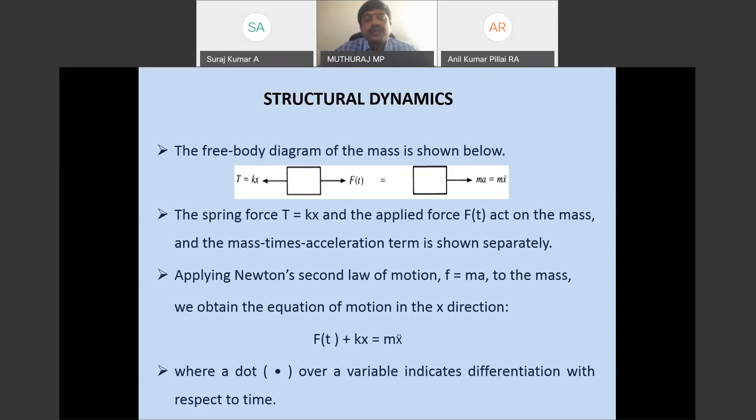Similarly, when you want to scan any building, or when you want to understand the building, first you always have to use this equation, because free vibration without damping alone will give you the basic behavior of a structure. The basic behavior of the structure has to be understood by natural frequency. Natural frequency is denoted as omega. Omega you always have to find. For any building, we always have to find the natural frequency. Apart from this, there are 3 other vibrations also.

You can see here in this slide that omega is equal to root of k by m. Omega is always associated with stiffness and mass. Stiffness is an inherent property of the structure. Mass is also an inherent property of the structure. So externally, no load will increase or decrease your natural frequency. Natural, you can understand that. Frequency is a term. Naturally, what is the frequency? That you always have to estimate.

Like the properties and behaviors you have in your human body, your pulse rate and your heart rate entirely depend on how your body is. Similarly, what is the weight? From weight you can convert it into mass. Then k is nothing but stiffness. Stiffness depends on material property and geometric property. Material property is known as modulus of elasticity, because we will be designing the structure as a linear, static and elastic structure. So for linear and elastic structures, you can easily find k as EI by L. E is modulus of elasticity, I is geometry, L is length. So everything depends only on the inherent property and inherent behavior of the structure.

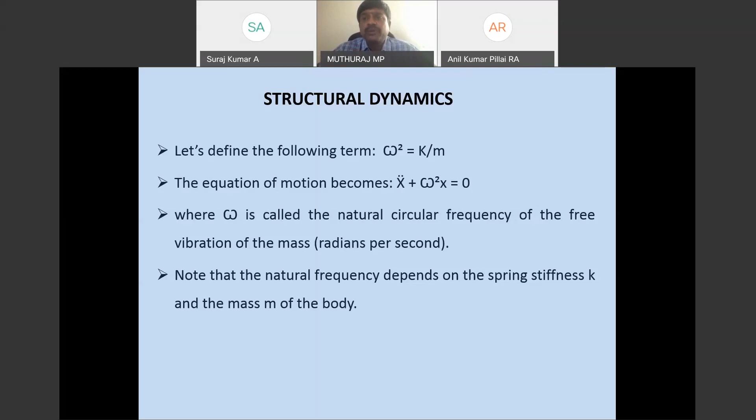So we always have to spend some time on how we can find the natural frequency. Natural frequency is always very, very important. But we cannot directly go and find the natural frequency of any building. So before finding the natural frequency, first let us try to understand the basics of dynamics. When the structure starts vibrating, whatever the maximum displacement is, that is called amplitude.

Actually, displacement is of 2 types. We all know that it is translation and rotation. Rotation is also very important. Translations produce forces, rotation produces moment, as we all know. You usually will be finding M-phi curves or P-delta curves. So whenever you are interested in finding the displacement, whether it is a rotation or a translation, in dynamics it is the same, but the translation here is called amplitude of vibration, because it is time dependent. So for any time dependent vibration, you always have to estimate the amplitude. Amplitude of the vibration is very, very important.

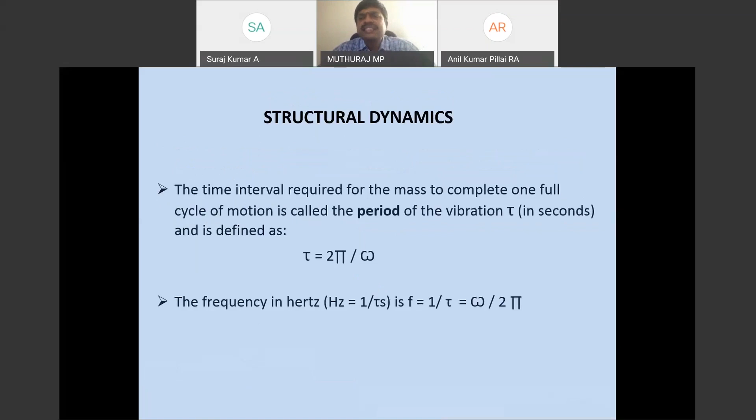Usually in earthquake problems, we will be restricting the amplitude of vibration to 10 millimeter. Whatever building you have, it shakes horizontally. When it shakes horizontally, how much amplitude do you want to limit? That you have to learn, because here the curve is shown in the horizontal direction. You have to verify the horizontal displacement. That horizontal displacement is called amplitude of vibration. After that, you can estimate the period. Frequency means how many cycles of vibration your structure undergoes. Usually it will be in terms of hertz.

These are the definitions one has to understand. Degree of freedom is always very, very important, and it is very simple. It is the definition normally people use in statics. In statics, degree of freedom is the number of independent possible displacements. Possible displacements are translations and rotations. So the number of independent possible translations and rotations required to define the deformed shape of the structure is known as degrees of freedom. That is for a static structure.

Because the earthquake is a horizontal force. The earthquake will hit your structure at the bottom. So horizontally, when it hits, what will happen sideways? That you have to understand. So usually we'll be taking the horizontal degree of freedom rather than the vertical degree of freedom. But if you are taking the vertical degree of freedom also, it is fine.

But the only thing is that you have to estimate and evaluate what will happen in the horizontal direction. Horizontally, how much amplitude of vibration is there? How do you have to resist? How many cycles of vibration are there? For that, you always have to understand the basics and the basic definitions with reference to dynamics. So degrees of freedom is very important.

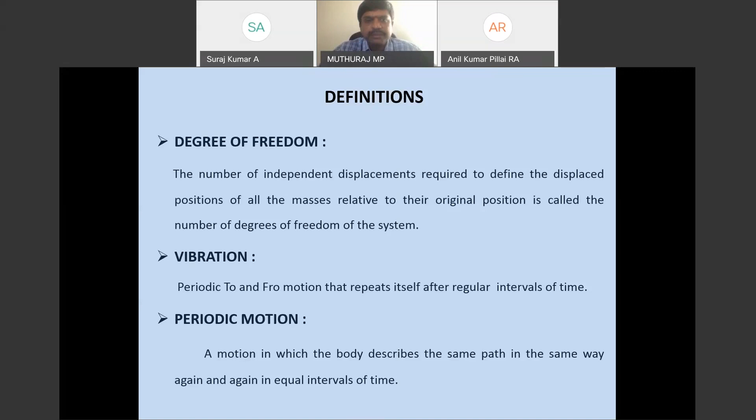Then vibration, then periodic motion. Periodic motion is nothing but a sinusoidal curve or any particular curve. That will not happen with reference to earthquake, but to understand the basics, you should know what it is. Then stiffness is known to us. It is the load required to produce unit deformation. Then time period. Time period is constant. Amplitude of vibration will always be different, but time period will be constant.

Suppose, for example, a structure is undergoing 7 cycles of vibration; for each cycle, the time period will be constant. It may be 1 second or 1.5 seconds. At this moment, I can tell you that the maximum possible vibration will happen within 30 seconds. So over the period of 30 seconds, how many cycles of vibration? If your time period is 3 seconds, then 10 cycles of vibration will be there. If your time period is 1 second, your structure will undergo 30 cycles of vibration. So based on the time period, you can find the frequency, natural frequency and all these things.

Then logarithmic decrement, it's very, very important because all our structures will have damping, because damping is an inherent property. There are 3 important inherent properties in a structure. First, I told you about mass, then you have stiffness, then the third one is damping. So mass, stiffness, and damping are very, very important for any structure. So when damping is there, the number of cycles of vibration will be slowed down. Instead of going for 30 cycles of vibration, the structure will undergo 10 or 5 cycles of vibration.

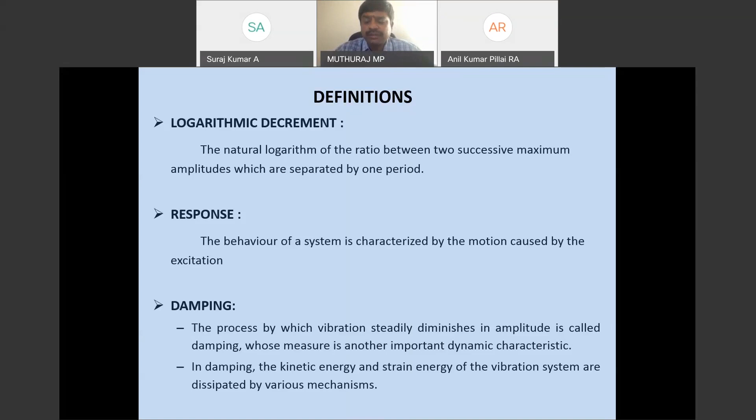That is m u double dot plus c u dot plus k u is equal to F of t. This is the generalized equation of motion. When c u dot and F of t are 0, it is called free vibration without damping. And when F of t is equal to 0, it is called free vibration with damping. Then similarly, forced vibration: forced vibration without damping and forced vibration with damping. So there are 4 different types of classifications that one has to understand.

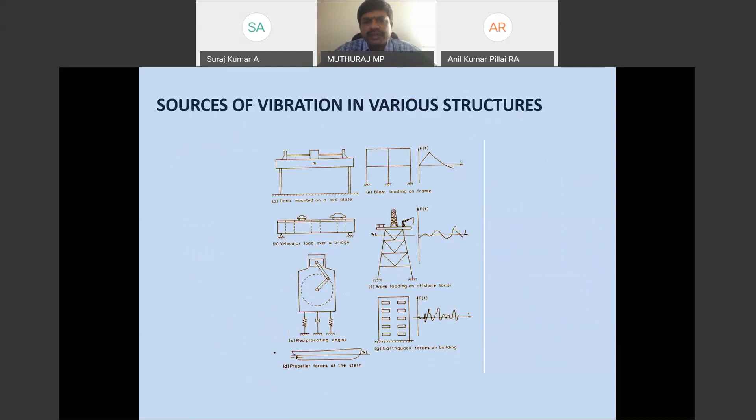So now let us try to understand that. Before going into that, what are the important components? That is damping. After that, you see that vibration is common. It may happen with machines and buildings everywhere, even in towers; wind force and many things can cause vibration. But we have to idealize the structure, because when we make a mathematical model, the structure has to be idealized.

When you are going for an idealization, you can see that there are 3 components in a massless tower. You can see that mass is the weight of the tower. Then u is the displacement, the horizontal displacement. That's what I told you initially. The horizontal displacement is always very important.

But for example, you are having a 12-storied building, so you have 12 degrees of freedom. So for each and every degree of freedom, you have to evaluate what is stiffness. Stiffness for 1 floor, 2 floors is very easy, whereas beyond 3 or 4 degrees of freedom, it will be difficult. So I'll tell you how that can be evaluated. You can see this in this diagram.

You have force. Force is a function of time. There are 3 other forces: force due to displacement, force due to velocity, force due to acceleration. Force due to displacement is known as K into U. Force due to velocity is C into U dot. M into U double dot is nothing but force due to acceleration.

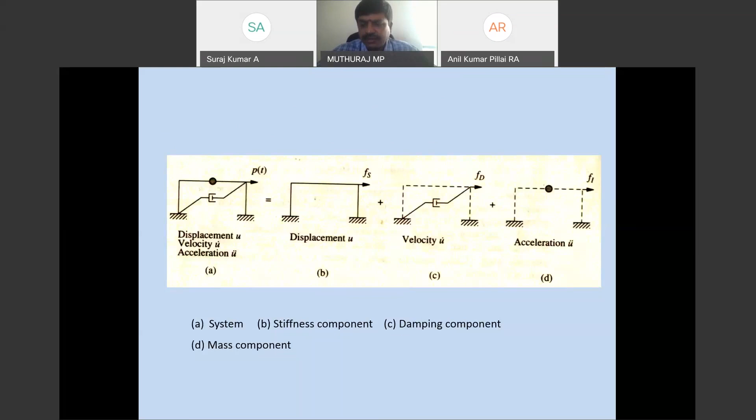Now let us come to a single degree of freedom system. For any single degree of freedom system, I told you that you always have to evaluate the natural frequency of the system. So when you are evaluating the natural frequency, what is the type of equation that you have? I told you already, m u double dot plus k into u is equal to 0. So it is a second order differential equation.

So one has to be very strong in second order differential equations to solve the problem, to find the natural frequency of the system. We are not talking about the earthquake force and other aspects of the seismic forces. To understand the basic behavior of the structure itself, mathematically one has to be very strong in solving the second order differential equation. When you are solving for amplitude, it has two components: one is the complementary function, another one is the particular integral. So for any problem, you always have to find the particular integral and the complementary function. Only once you are able to solve this can you complete this.

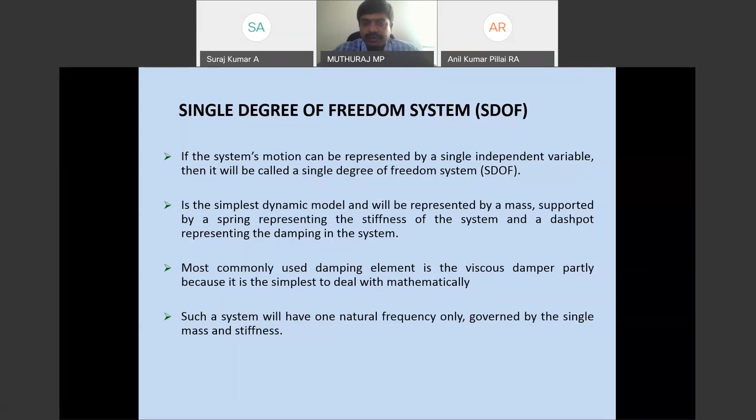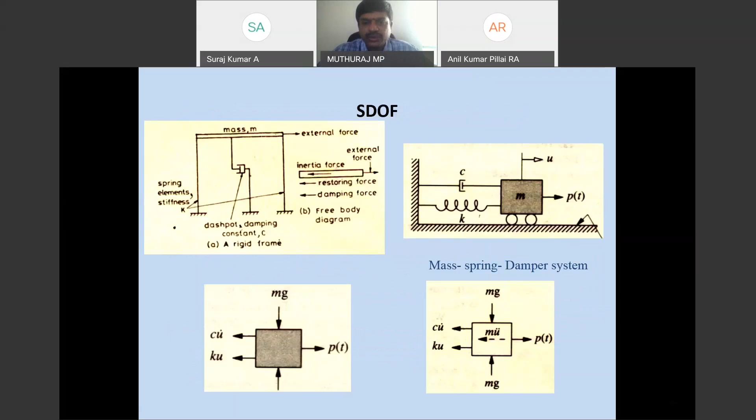So you can see in the last diagram, the mass spring damper system, you have force, then mass, you have m u double dot, c u dot, and k into u. This equation I already explained. So finally, you can find omega. Once you solve this equation, you can find omega. Omega is nothing but natural frequency, given by the equation root of k by m. These are the examples of single degree of freedom systems.

Next I will pass on to the multiple degrees of freedom system. If you are strong in mathematics, it will be easy for you, because I already told you that force equals stiffness into displacement. So displacements you can solve by means of stiffness. Once you know the stiffness, you can easily find displacements by taking the inverse: k inverse into f is nothing but u.

So when you are interested in finding u, usually you will be solving by matrix. Here there will be three matrices: mass matrix, damping matrix, and stiffness matrix. So you have to combine all three matrices and solve it. That's all. So when you are going for a multiple degree of freedom system, it is important to solve for stiffness.

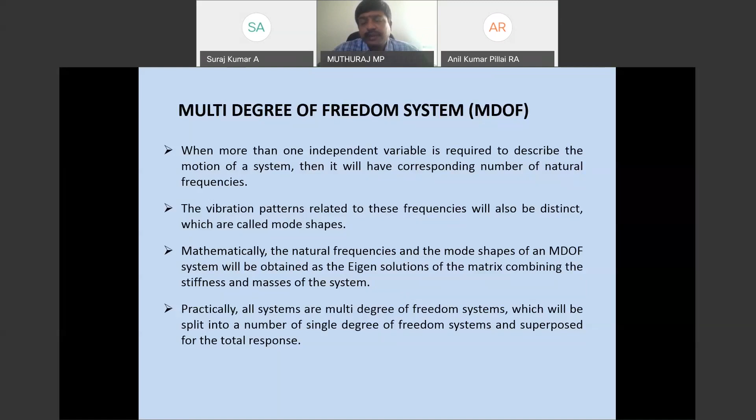To solve for the displacement or natural frequency: first, you have to find the natural frequency. Once you know the natural frequency, you can find the displacement. So to solve for the natural frequency, it is always very, very important for you to understand how you can evaluate the property. The evaluation is basically with the mathematics. So mathematically, you have to be very strong in finding the natural frequencies.

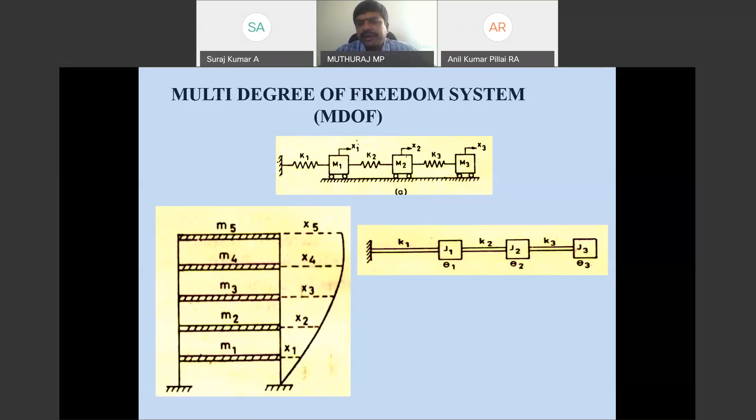So free vibration, as I told you already, is very, very important. For any free vibration, we have 3 types of damping systems. They are known as underdamped, critically damped, and overdamped systems. Most of the concrete and steel structures are underdamped systems. So underdamped systems will have a value of something around 0.05 or 0.02, as I told you earlier.

So for an underdamped system, you should know how to evaluate how many cycles of vibration are possible. Because, as I told you already, the time period will be constant. The time period for a particular vibration is always constant. Only amplitude is a variable. So you always have to evaluate the constant part, the time period. Then what is the frequency of occurrence of the earthquake at your place? Because the earthquake vibrations will be different at different places. Anyway, I'll come back to it when I discuss earth structures in the second part of my presentation. So these are all the possibilities.

Then the forced vibrations. Here it is external; the vibrations are external excitations. What are all the possible external excitations? We have impulse vibration, inertial vibration, harmonic, periodic, and transient. But our earthquake, we have to classify it as a transient vibration. What is a transient vibration? A transient vibration disappears with time. So the vibration will start and disappear within 30 seconds.

But impulse is different from transient. Impulse is very, very short. The time will be almost 0 seconds, or 0.2 or 0.3 seconds. That's what impulse is. Whereas transient vibration will go up to 30 seconds. So for a particular period of 30 seconds, you should understand what is happening with the structure, and how you can evaluate the basic properties and behaviors. The first property is displacement. Very importantly, we always have to evaluate the amplitude of the vibration.

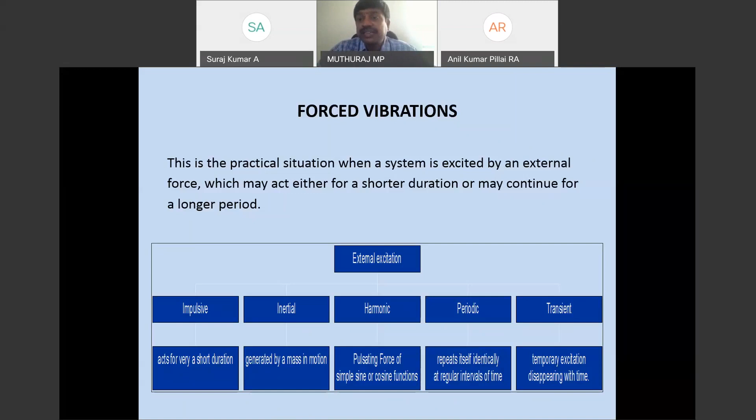So when you are interested in finding how the external earthquake excitation is happening, it is purely a transient vibration. So importantly, you have to understand the basic theory of transient vibration. For that, there are several mathematical formulations. Let us not go into the mathematics much, but anyway, for dynamic equilibrium, you also have a force polygon.

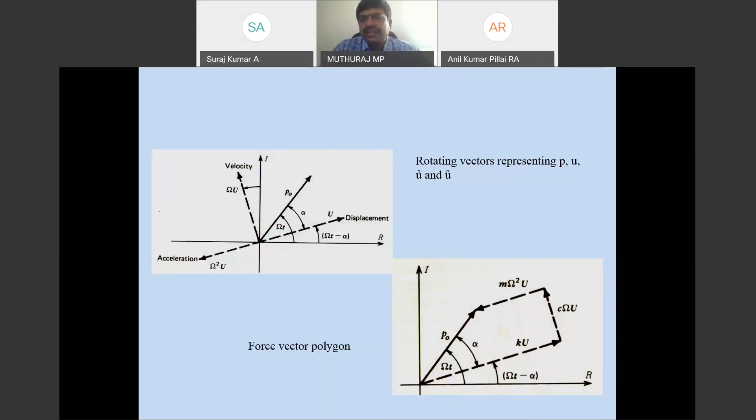So for that, you have to understand the second diagram. That's very important: Ku, Cu, and Mu. All these three things together are equal to P. This is called the dynamic equilibrium equation. You can also go with the force polygon. You can see that there are three forces: static force, damping force, and inertia force. All these three forces combine. The transmissibility is useful, but not much in the earthquake field. For machine foundations, we normally use transmissibility and these things.

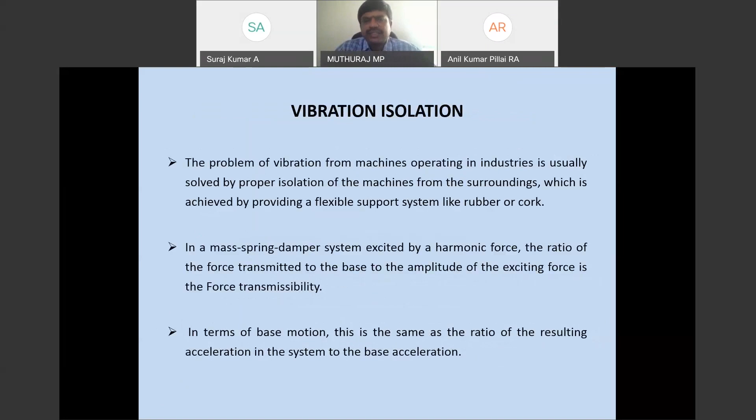Then what's very, very important, which you might have heard from many people: you have to isolate the vibration, because when the earthquake force is happening for a period of 20 or 30 seconds, your number of cycles of vibration should be as few as possible. So you have to isolate the vibration. How can the vibration be isolated? The vibration can be isolated with the provision of dampers: active dampers, passive dampers, and so on. So for that, you have to understand a little about the damping system. Then modes of vibration are always very, very important.

For a multiple degree of freedom system, as I told, you may have 5 degrees of freedom, 8 degrees of freedom, 12 degrees of freedom, as many degrees of freedom as you have. For example, your building may have 7 degrees of freedom. When you have 7 degrees of freedom, you have 7 modes of vibration. But not all the modes of vibration are important. The mode of vibration which gives more amplitude of vibration, that you have to select. That's what is very, very important. So where the amplitude of vibration is very high, those mode shapes you always have to take care of.

If a building has 100 mode shapes, all those 100 mode shapes are not necessary. Only 6 or 7 mode shapes are enough. When you have a 12-story frame, only 2 or 3 mode shapes are sufficient to define what will happen to your building. Because for the first natural frequency, you have some amplitude. For the second natural frequency, you have some amplitude. For as many degrees of freedom, you have as many mode shapes. So at least 1, 2 or 3. That's what we call the fundamental mode. So the fundamental natural frequency you always have to find. Based on the fundamental natural frequency, you can analyze.

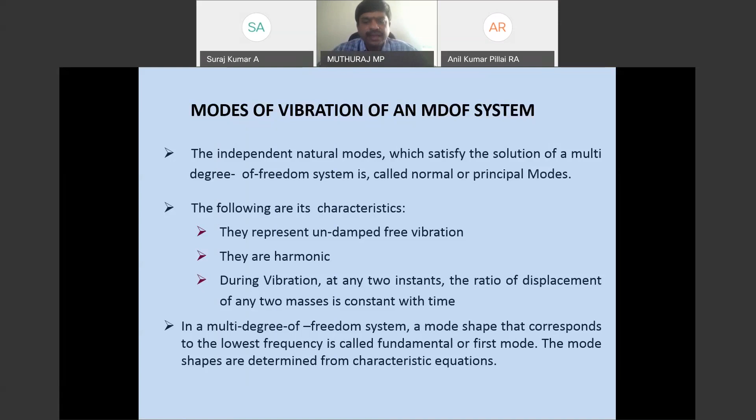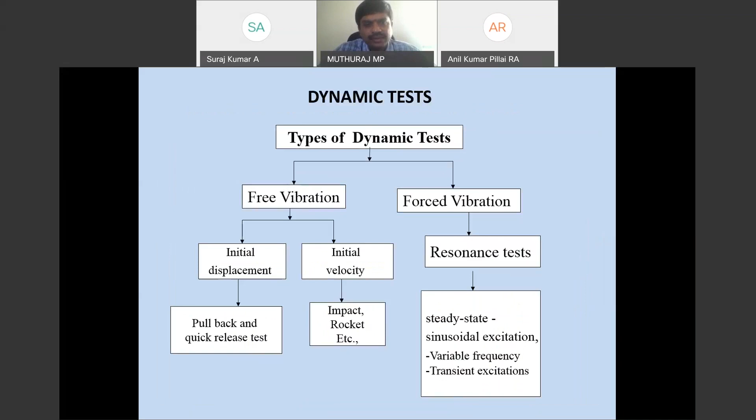I think you might have learned from what I talked about for around 15 minutes. It is always very important to understand structural dynamics. You should know structural dynamics thoroughly. What is frequency? What is natural frequency? What is time period? What is damping? What is stiffness? What is mass? All these things you have to be very thorough in. Only then can you come to the seismic concepts. When you don't know the basics of dynamics, it's very difficult to follow the seismic concepts.

So first, for any civil engineer, it's very important to understand statics. What is the static equilibrium equation? F is equal to K into U. You have to be very thorough in this equation, because for F equals K into U, you have a lot of equations to solve, a lot of mathematical processes. You have the moment distribution method, you have the stiffness method. So many things are there that you have to learn in the static condition.

After learning statics, you have to come to the basics of dynamics. You don't need to learn much about dynamics. Only what I told: for a transient vibration, what things are needed, those things you have to learn. Similarly, how to evaluate natural frequency, just learn those things. Then you can come back to learn how to design buildings with the earthquake resistant concept.

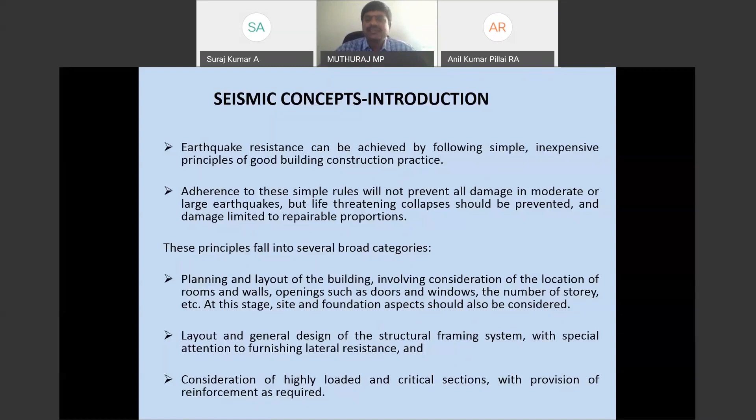So lithosphere and crust are very, very important, more than all other things. It is not necessary for us to know in detail about the inner core, outer core, and all these things. You just try to understand the basics. The radius of the earth is 6,400 kilometers. That is the first thing one has to understand.

The second important thing is that a lot of geological changes happen through geology. Geology classifies most rock formations into three groups: igneous, sedimentary, and metamorphic. But that formation takes millions of years, so the crust of the earth is always very, very important.

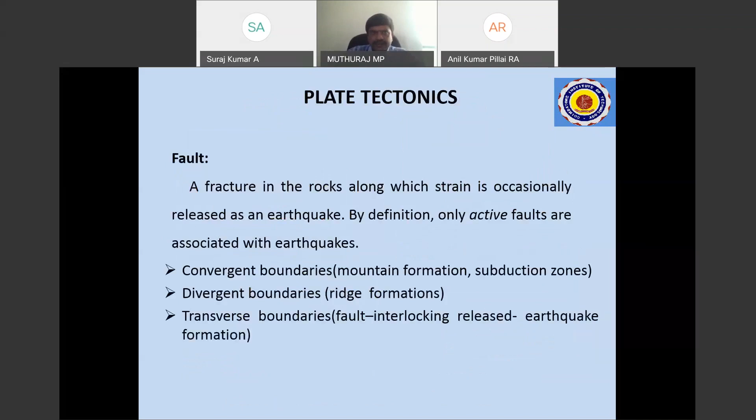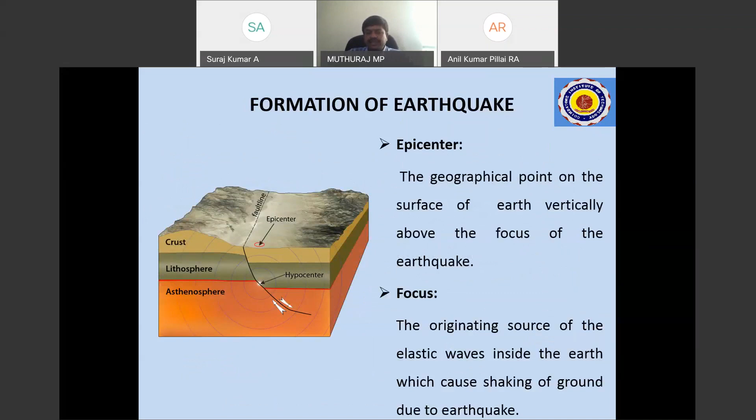Where the earthquake hits the earth's surface is called the epicenter. Inside the earth, in the lithosphere, that point is called the hypocenter or focus. So you have to understand what is focus and what is epicenter. Focus is below the earth, and wherever you find the field of vibration on the surface, that is called the epicenter.

Then there are seismic waves, which are collected as two types: primary waves and secondary waves. Based on our analysis, there are always two direct forces: axial force and shear force. The axial force is called P waves, and the shear force is called S waves. So there are two waves: primary waves and secondary waves.

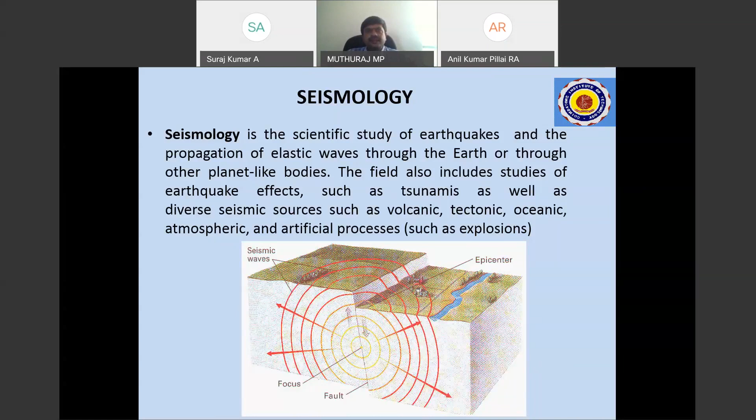There are a few things to see here about the different types of waves: the primary wave and the shear wave. These are the major waves, so there are two types of waves.

Then we have to understand focal distance and epicentral distance. Similarly, a shallow earthquake has its focus at less than 70 kilometers depth, which is very important to understand. A micro earthquake has very minimal amplitude that may not be felt by people. And fault is the failure zone.

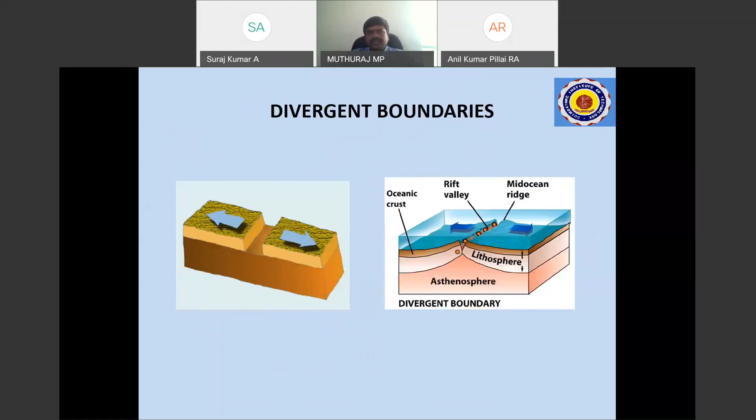The boundaries and waves have already been explained. Now there are a lot of earthquakes that have happened in India, so many earthquakes. You try to understand the Bhuj earthquake, the Killari earthquake—there are so many earthquakes.

What is very important in these earthquakes is to understand how long the earthquake lasted, what the time elapsed was, and what amplitude it produced in different places. For that, again, we have to look at this effect.

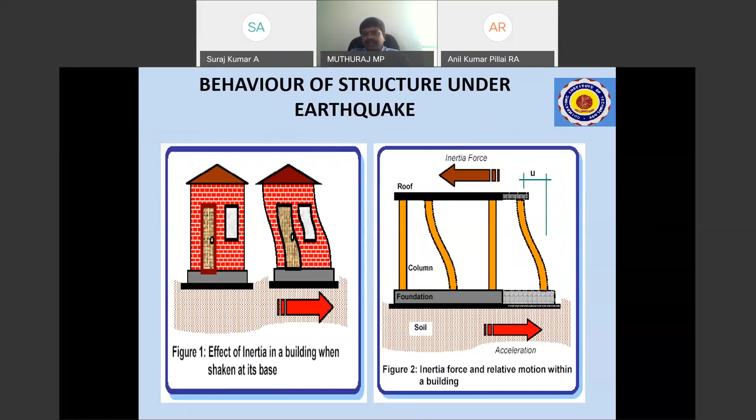You can see the behavior of the structures—I think you might have received this from many people. Usually we know that the earthquake vibrates horizontally, so the inertia force goes in the opposite direction. Therefore, you have to give much attention to the horizontal displacement, denoted as u, and then find accordingly.

Cycle of vibration will reduce. When you are having more natural period, cycle of vibration will be reduced, then slower shaking will be there. When slower shaking is there, it is good for your building. Such a way that you have to plan. That is about the natural period.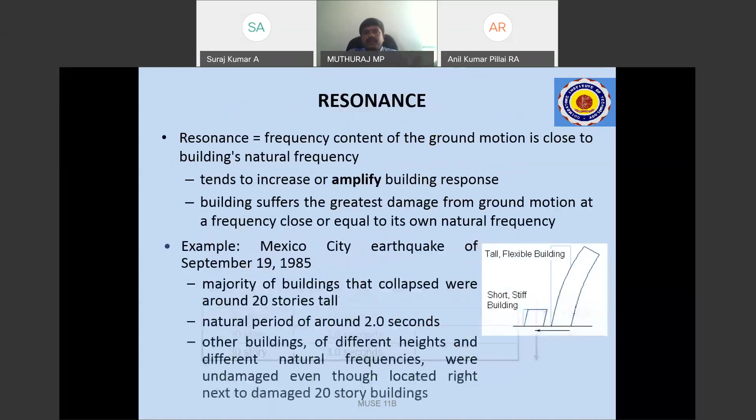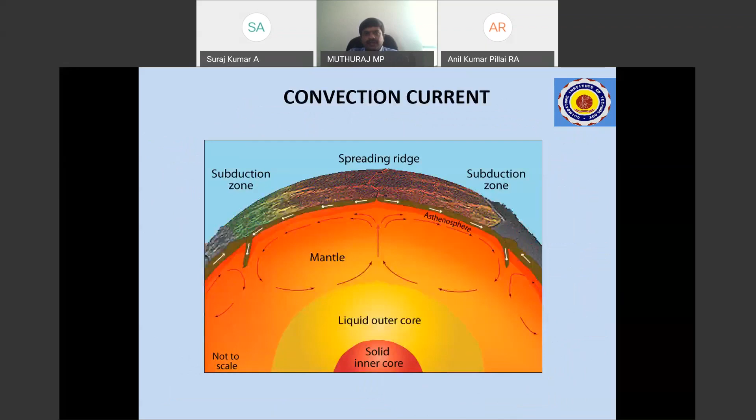Now let us complete this science of the earthquake. This is very, very important - what is the part of the earth, what are the plates, how it moves, and what are the basic definitions. These are all science. Based on science you have to understand all these things.

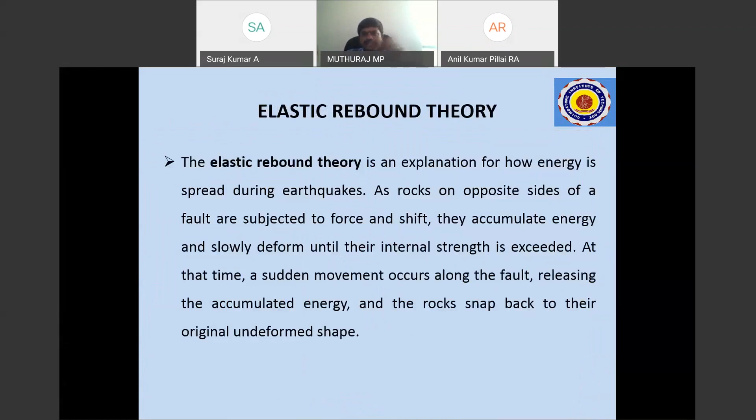This is very, very important - elastic rebound theory. So what will happen after the earthquake happened? Automatically it readjusts. Whether the primary or secondary waves which are happening, automatically the earth is readjusting. That's very, very important.

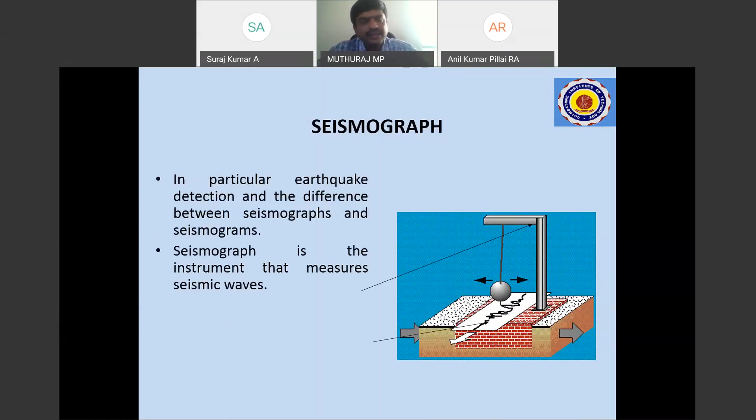So based on this, you have to measure the earthquake - how the earthquake is being measured. For that, you have to understand what is seismograph and accelerometer. A lot of seismic measuring devices are there in and around almost all cities. Even in Coimbatore we have earthquake measured at the airport, and also at the Tamil Nadu Agricultural University center. So we have a device, and based on that we can find: accelerograph is nothing but strong motion, and seismograph is light motion.

So less than 3 Richter scale value is recorded in the seismograph, and higher values are recorded in the accelerometer. That's what one has to understand. And 2 more things also there - MMI scale and Richter scale. That's very, very important - Modified Mercalli Intensity scale and Richter scale, always very, very important.

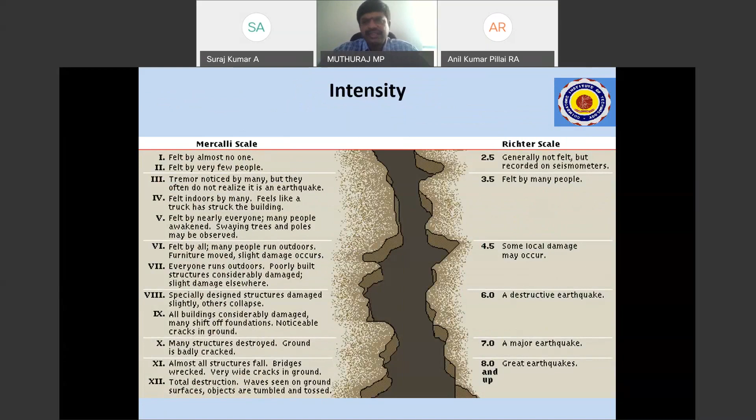Mostly we'll be using the Richter scale. Then there's the Medvedev-Sponheuer-Karnik scale, MSK scale - that is also very important. So any scale you can use - MMI scale, Richter scale, or MSK scale. It is up to us which one we use. But the intensity of the earthquake is very, very important. Intensity of the earthquake, anything you can measure.

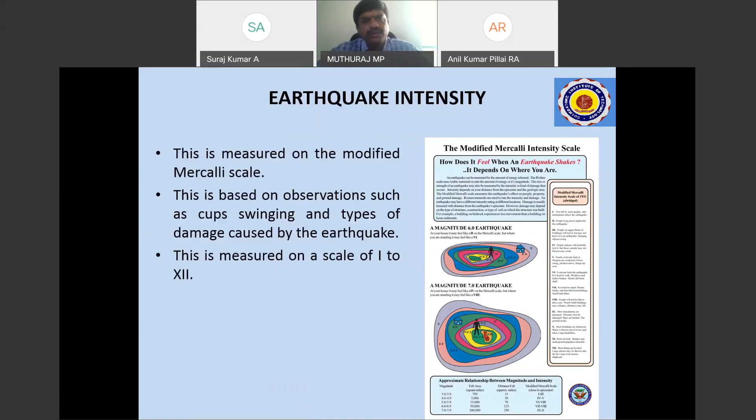So it is a scale of 1 to 12. And again MMI scale, you can see a lot of basic things - that is from 1 to 12. There are 2 things there: how you can measure the magnitude of the earthquake, and what is very, very important that you have to understand.

The magnitude of an earthquake is always constant. For example, magnitude of the Killari earthquake is constant, magnitude of the Bhuj earthquake is constant. Magnitude of any particular earthquake is always constant, but intensity of the earthquake is variable from place to place. For the Bhuj earthquake, intensity is different from Ahmedabad to Chennai to Bangalore to Pune, because neighboring cities will have less magnitude effect - so it may be higher or lower. But magnitude of a particular earthquake is always constant, that's what you have to understand. Magnitude of any earthquake is always constant; intensity of the earthquake is variable.

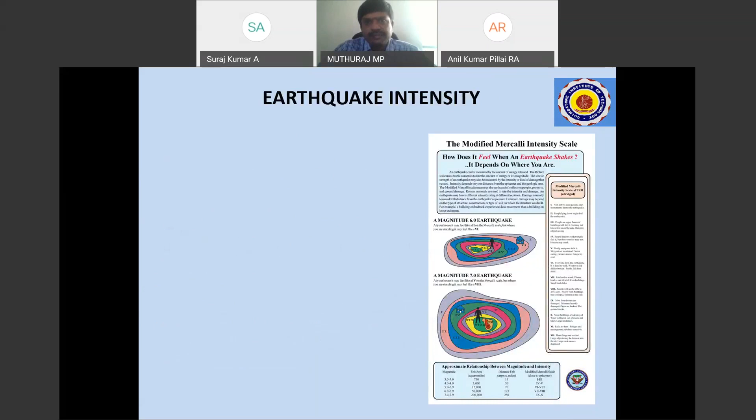So this is the important thing that you have to understand - basically the science, all these are science. Now let us go to the engineering part of the earthquake. What will happen because of the earthquake - in the past 20 to 30 years, what has happened with us? So first we will discuss that, then we'll go to the design part.

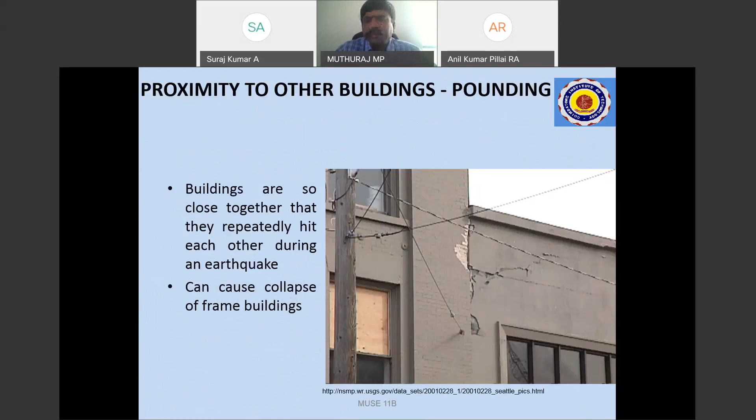So you can see what will happen. There are damages due to short column effect. Then if you are not providing good connections, again it will be a problem. You can see the braces - in this bay it is a rectangular bay, so one diagonal will be under compression, the other diagonal will be under tension. Obviously masonry or concrete will not take care of tension.

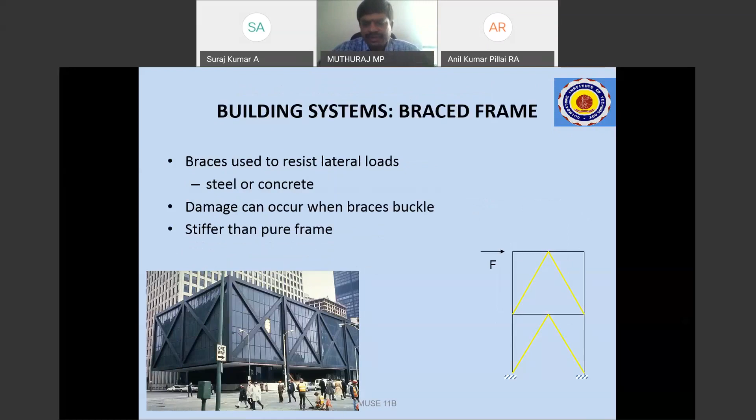It's better for you to go with X-type structures or X-type connections, or X braces - it is similarly good for resisting earthquakes. This avoids short column failure. If you're introducing shear walls, it will also be good. Wood is also an excellent material to resist earthquakes.

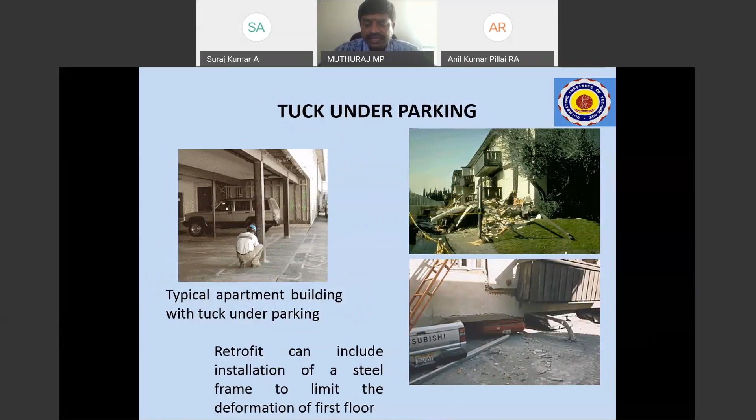Soft story is a problem we already know about. Even in IS 13920, the soft story should be eliminated. The difference in stiffness between adjacent stories should always be as less as possible. So we should have shear walls and other connectors so that the stiffness at least will be matched.

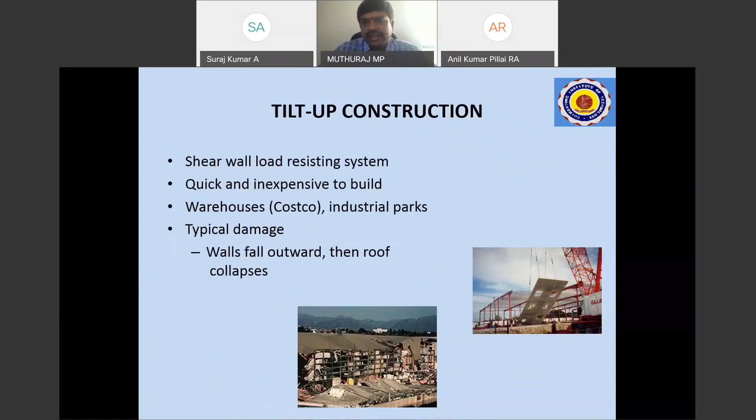Then there is tilt-up construction. When you have an unsymmetrical structure, a lot of things will happen, like torsional force. In IS 13920, and also 1893, there is a provision for how you can take torsional force into account. Then you can go with some retrofitting, like X braces or something similar, to take care of tension.

During an earthquake, masonry is very strong in compression - both masonry and concrete are very strong in compression. So we have to resist the tension, because it is a movement in the horizontal direction. If it moves to this side, it will be under tension; if it moves the other way, it is under compression. So compression will be taken, but tension will not.

But it is impossible for us to keep the building to a very low cycle of vibration. For example, if we are planning our building to undergo only 3 cycles of vibration, it is not possible, because earthquake force is very difficult for us to predict.

That's what we call earthquake resistant design - we can resist the earthquake, but we cannot absorb the energy offered by the earthquake. That is very highly unimaginable, and the structure would be uneconomical. That is not possible.

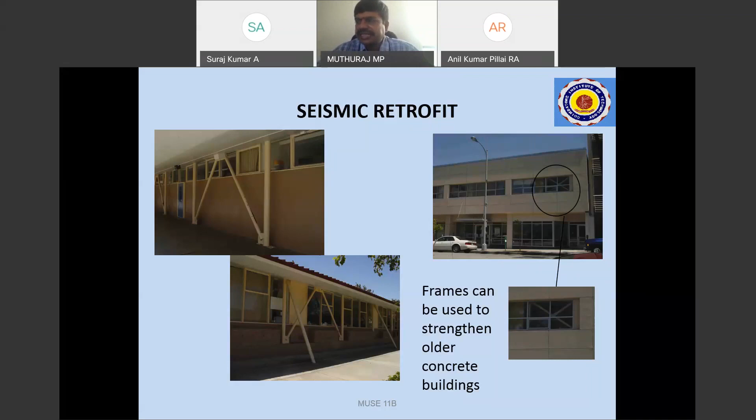So as far as possible, we try to make the structure more congenial towards earthquake forces, so that when earthquake forces act on our building, the structure will undergo fewer cycles of vibration. We have to allow for as few cycles of vibration as possible for our building.

So what we have to do instead is construct shear walls, and we can improve the performance - that is performance-based design, as we call it. I think you might have received many lectures on this, basically on rehabilitation of structures and retrofitting. After rehabilitating, you have to go for retrofitting, so based on the requirement, we improve the performance of your columns, beams, slabs and so on.

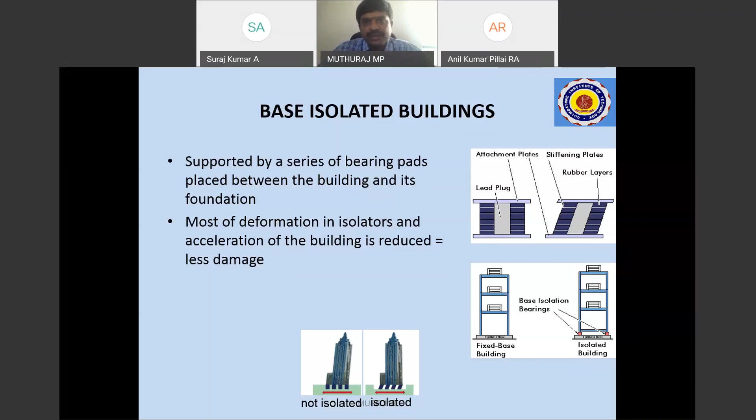Some other examples you can see are non-structural issues - I think we have already seen this. Based on all these things, you can find what is the acceleration and what is the intensity of the earthquake. That is pure science, and then we have seen some engineering also.

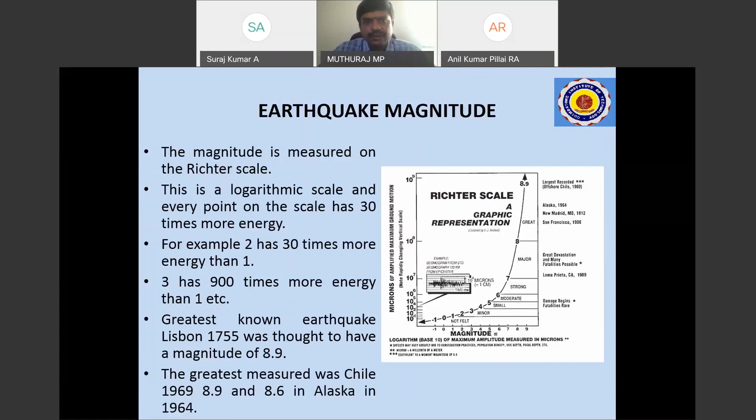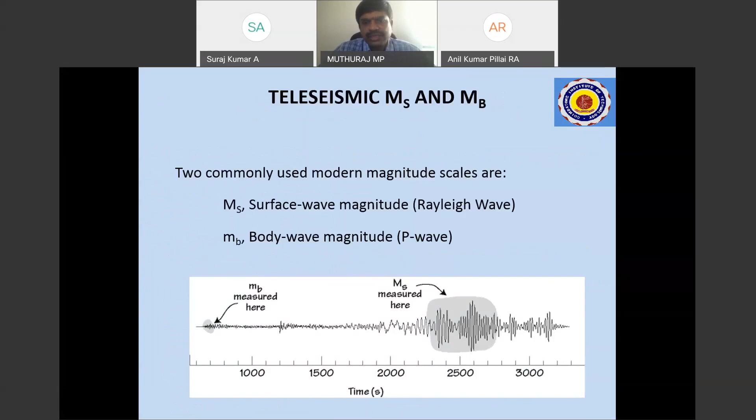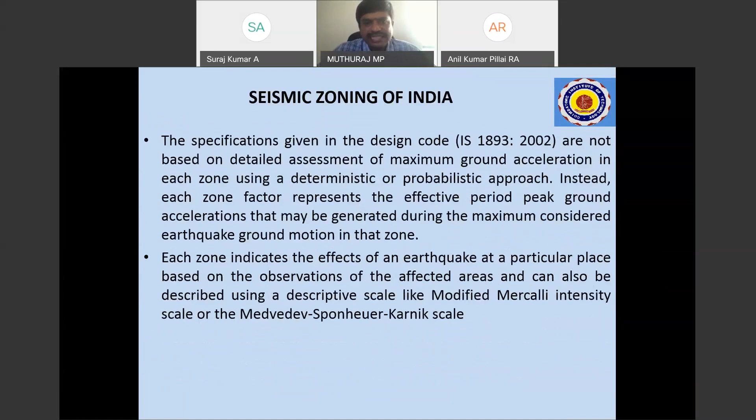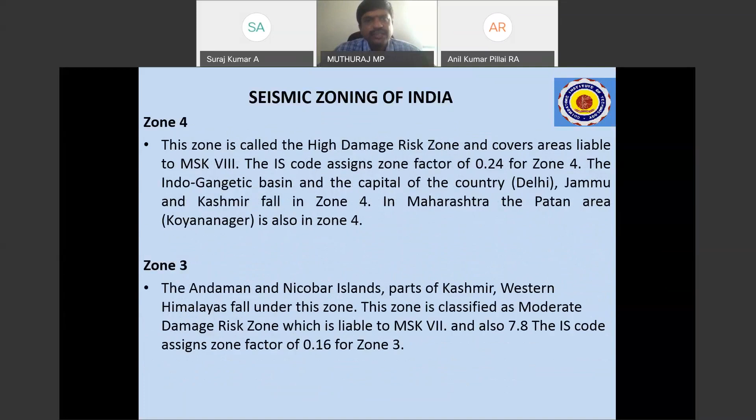So next is how India is being divided - India is divided into 4 zones. The first zone is completely eliminated, so we have zones 2, 3, 4 and 5. In zone 5, all these regions are there. Similarly in zone 4, regions like Maharashtra are there. In zone 3, Coimbatore, Andaman, Nicobar and other areas are included. Zone 2 has other regions. I think many parts of India are under zone 3.

You can see how it is being done - this is the first presentation. I'll go through the other presentation very quickly, showing how buildings will be designed, within maybe 5 or 10 minutes.

Okay, no problem, sir. Please go ahead. Yeah.

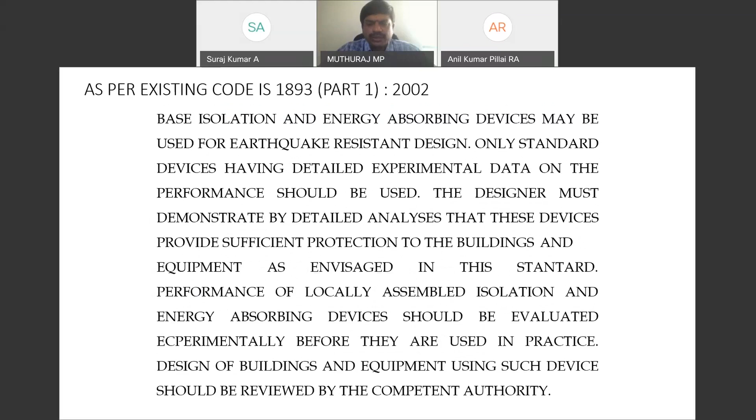Actually, you have to use IS 1893 as the codal reference. But if you look into IS 13920, you have to understand a few important things, how a column width is there. Similarly, as per IS 13920 as well as IS 1893, which was recently revised in 2016. Mostly we'll be designing the building basically with one simple equation.

That simple equation is for horizontal shear, because horizontal shear is very, very important. Horizontal shear is given by a very simplified expression, Ah into W. W is nothing but the total weight of the structure. Ah is nothing but the horizontal seismic acceleration coefficient. Ah depends on one simple equation: Z by 2, I by R, and Sa by g. Z is what we have just seen.

There are 4 zones: zone 2, 3, 4 and 5, and for each zone the factor is there. Then I is nothing but the importance factor. I by R: R is nothing but the response reduction factor, because we have to put the earthquake frequency in a band. That's very important. So in a particular band or response spectrum, which spectrum you are using, you have to understand. Based on that, you have to provide the response spectrum.

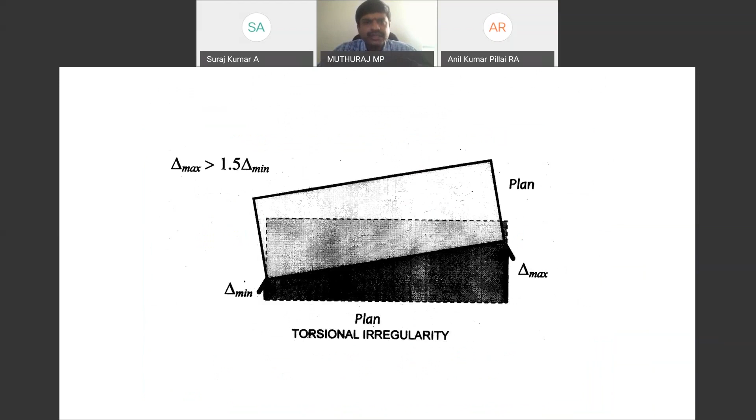Then for irregular buildings, there will be torsion, so you have to understand how the torsion can be taken into account. Similarly, I told you it is the response reduction factor because there are several systems, like the ordinary moment resisting frame. If you are using regular reinforcement with reference to IS 456, it is called an ordinary moment resisting frame. A special moment resisting frame means that instead of regular stirrups you have to use U-shaped stirrups, and the angle of inclination also has to be 45 degrees. So there are a few things you have to add extra. That is what we call special moment resisting frames. You can use both RCC as well as steel.

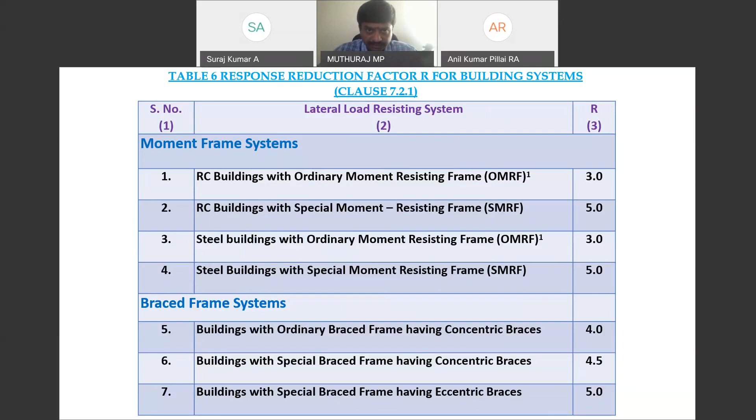This is the existing code, and based on that is Sa by g. Sa by g is very important, because Sa is nothing but seismic acceleration, and g is nothing but ground acceleration. You have to find Sa, but we may not find Sa correctly. That's why we are using this spectrum. But if you want, you can use the actual record; that is what we call time history analysis. This is called equivalent static analysis.

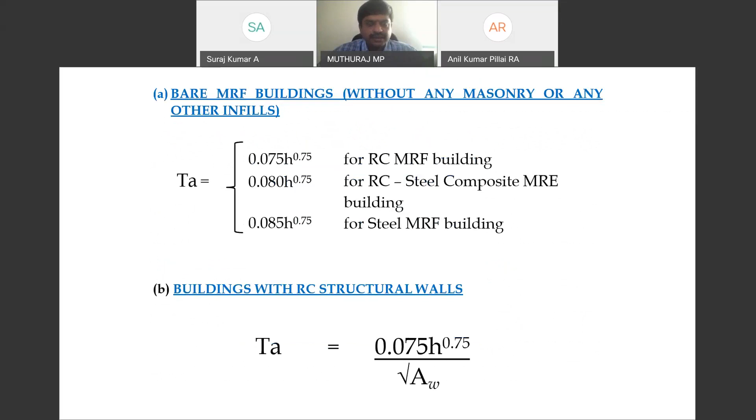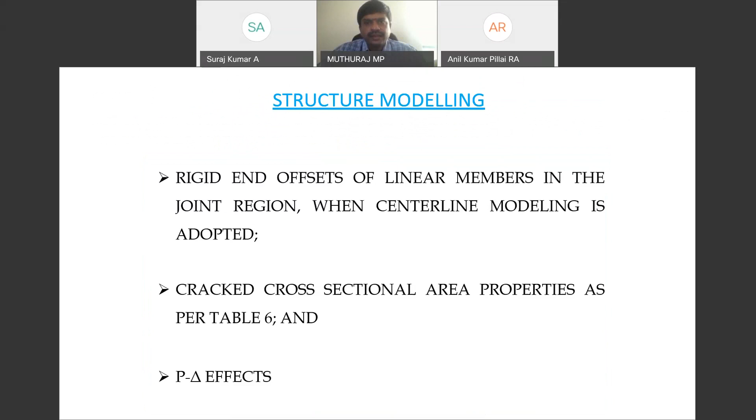There are three types of analysis. The first is known as the equivalent static approach. The second is response spectrum. Under response spectrum, you can use three mathematical principles, known as the absolute method, CQC method, and SRSS method. Both SRSS and CQC methods are given in IS 1893. You can use all those, and finally you can find, based on this equation, the time period. As I told you, the time period is constant. So what is the structural system you have to use? Then the detailing.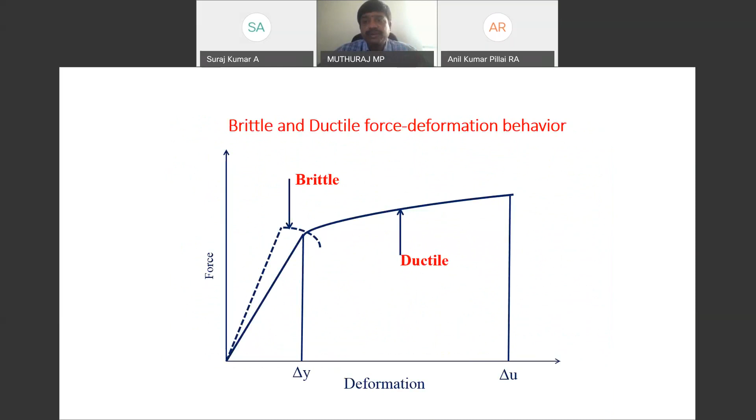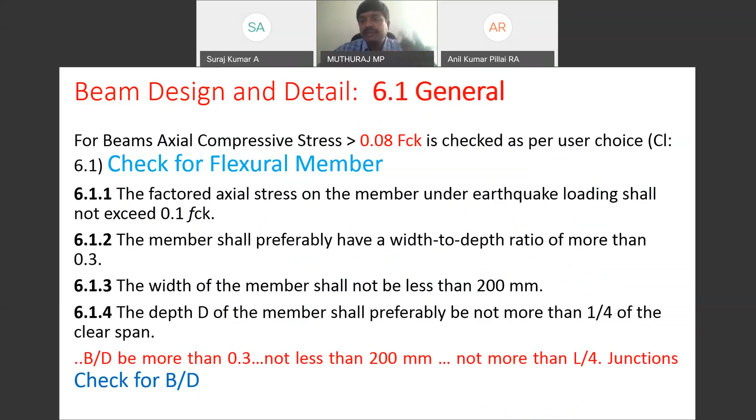But we know that the steel frame has to be very ductile, and the concrete frame has to be very ductile. So ductility is an important thing. Your building should have a ductility factor of at least around 6; that will be good. When you go for a special moment resisting frame, you can improve your ductility. And one more thing, we always go for the strong column, weak beam concept. The column has to be very strong, because, as I told you, the stiffness of the column is 12EI by L cubed. So 12EI by L cubed has to be superior to that of the beams in the horizontal direction. Stiffness of the beam is given by the expression 4EI by L and 2EI by L. So the column stiffness has to be more. And for the detailing, you can refer to IS 13920.

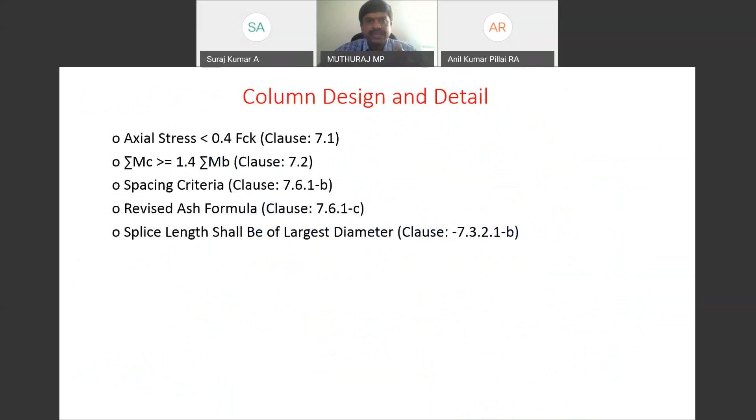These are the detailings that we have to follow. That is with reference to beam. Similarly, next for columns also, you have to use special confining reinforcement. What are the things that we need to follow? Everything is given in IS 13920. So how the detailing has to be done, what is the minimum reinforcement, and all these things, everything you have to see. Then development length also.

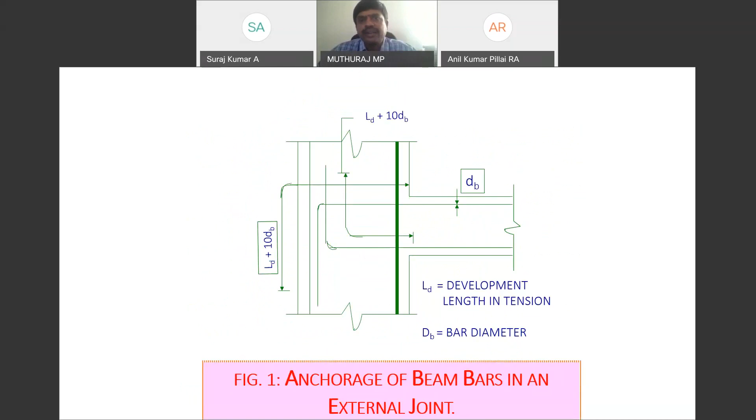Development length you can calculate as phi into sigma s by 4 tau bd, that is with reference to IS 456. Apart from this, you have to include another 10 times the diameter of the bar as an additional length. That is the important thing when you are thinking about anchoring the bars. Then how you have to provide the laps, and how you have to calculate, because I told you that 4EI by L is the stiffness. But apart from that, there will be an additional increment because of shear.

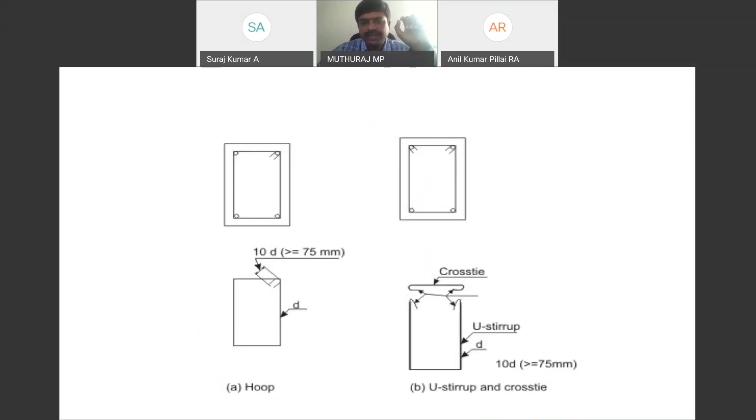Horizontal shear which is acting, that horizontal shear you have to convert into vertical shear. To convert the horizontal shear into vertical shear, when the frame is moving left to right or right to left, whatever equations you have to develop, I told you already, when you are using U stirrups and cross ties, it is called a special moment resisting frame. Normally we will be using hooks, that is general reinforcement with reference to IS 456. So you have to follow both the basic principles of IS 456 and IS 13920.

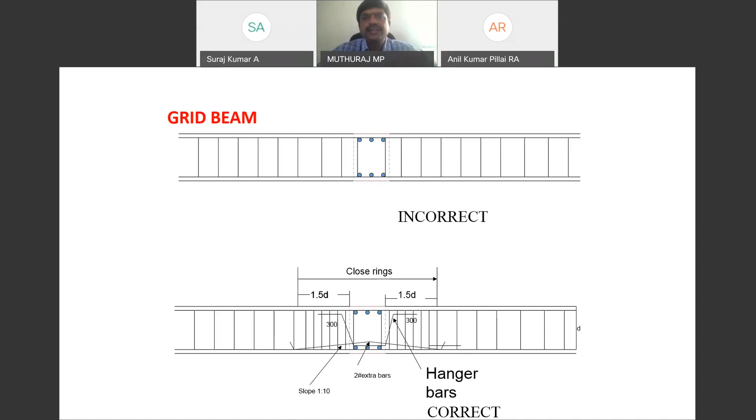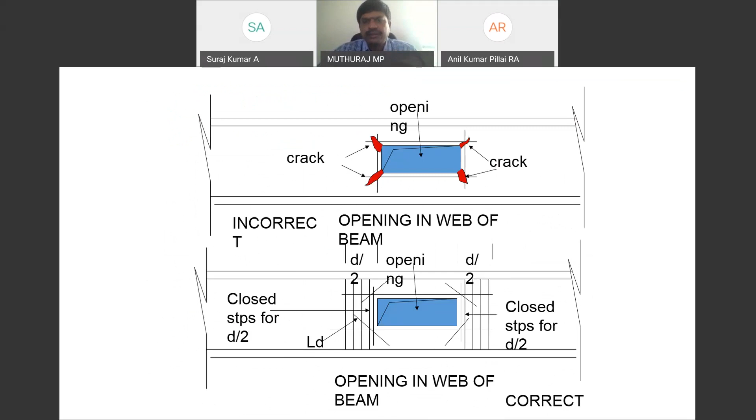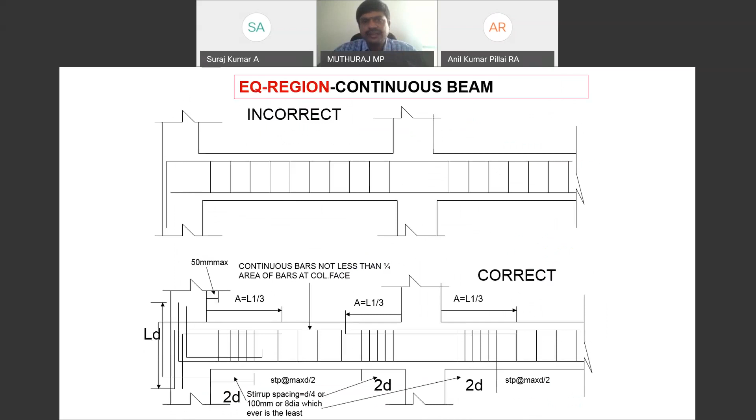Similarly, what you have to follow when you are having columns. The bars have to be taken inside, they should not be taken to the outside. All these things are available in IS 13920. Similarly, footing also: how you have to improve your footing, what is the development length, what is the cover you have to provide, and then what is the section. And similarly for staircases also, you can see what you have to use. You should not use the first diagram; the second one is what you have to use.

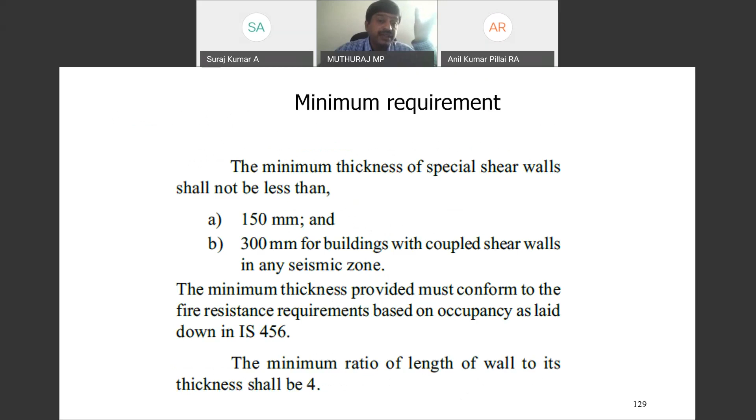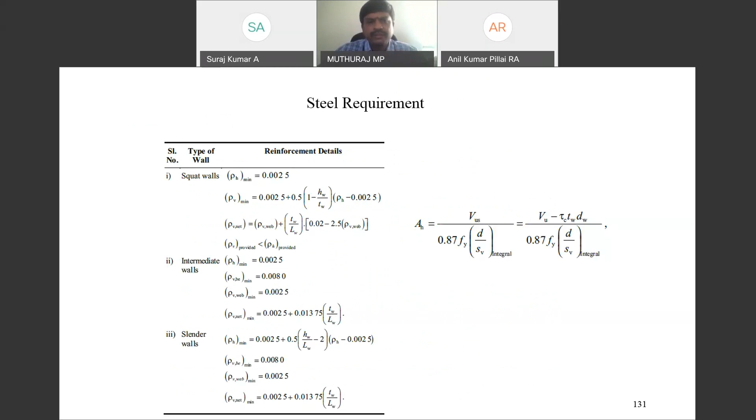Similarly, walls. Shear walls are very, very important. I told you already, shear walls you have to construct very well. Most importance you have to give to what the steel requirement is, the percentage. A minimum 0.25% you have to use, and respective formulas, because it is only shear. So stirrups are in the horizontal direction; in the horizontal direction you should have bars. How you can calculate, and how many cycles of vibration; the ductility is very, very important. And modes of failure, how will you find the gross area of the shear wall?

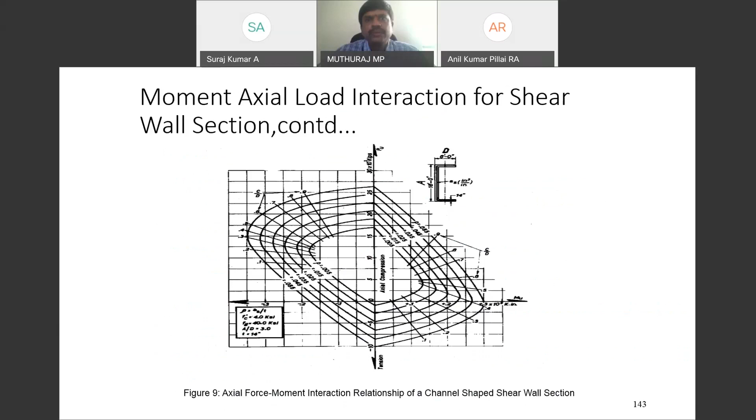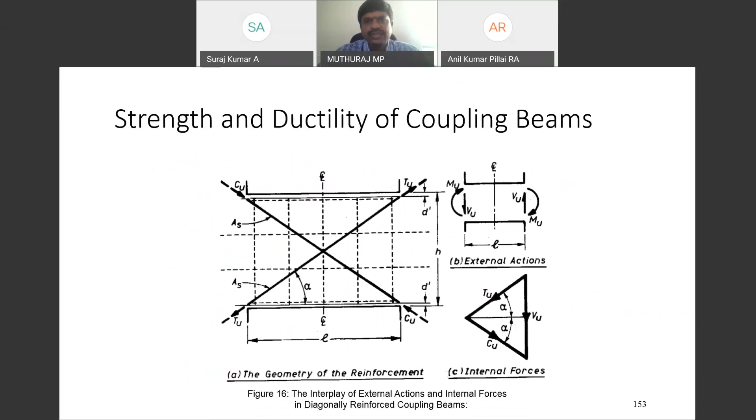There are different types of shear walls. You can follow accordingly with how much force is there: coupled shear wall, general solid shear wall, then shear wall with boundary elements. Several types are there. You can see the coupling beams, additional beams you can add at the ends. That is the coupled shear wall.

So this is what I want to share, but I think I had gone very fast in the third part. I think you might have understood the first two parts of my presentation. I can open the forum for the discussion now.

Now the time is exactly 12. So no problem. If you have some points, we can cover it. No issue, sir, if you have anything to cover. Yeah. No problem, sir. I think okay. Because one thing. 1 minute, sir. I'll come back to this. Sure. Please.

Right, sir. I think that was a good presentation. In fact, you covered from the basics to the codal provisions also, IS 13920. I think the salient features. And most importantly, how many do you think are following them now at our practical sites?

Yes, sir. Actually, whenever I go, I educate them, sir. There are a few things we always have to educate practitioners about. I think the Professor told in the introductory lecture that we need to take care of concrete, because from my point of view, instead of producing M20 we use 6 or 7 bags of cement. But with 6 or 7 bags of cement, you can produce M40, sir. That's easy, only if you have control over water. So that is the need for us to educate the practicing engineer, so as to produce quality concrete.

Even if it is specified in the specification as M20, go for M30 or M40. Definitely it will take care of so many cycles of vibration. Higher grade of concrete always will take care of higher vibrations, sir. I think now we are in the era of making our manpower system fully mechanical. In all areas, whether it is plastering or any area, our manpower is less. We are going for more mechanized operation.

So when we are going for more mechanized operation, U stirrups and cross ties are easy, sir. Rather than going for regular stirrups, once you are able to provide the U hooks and cross ties, I think it will act as a special moment resisting frame. I think it will be very good. In the years to come, maybe in another 3 to 5 years, definitely we will be doing all the moment resisting frames at the site.